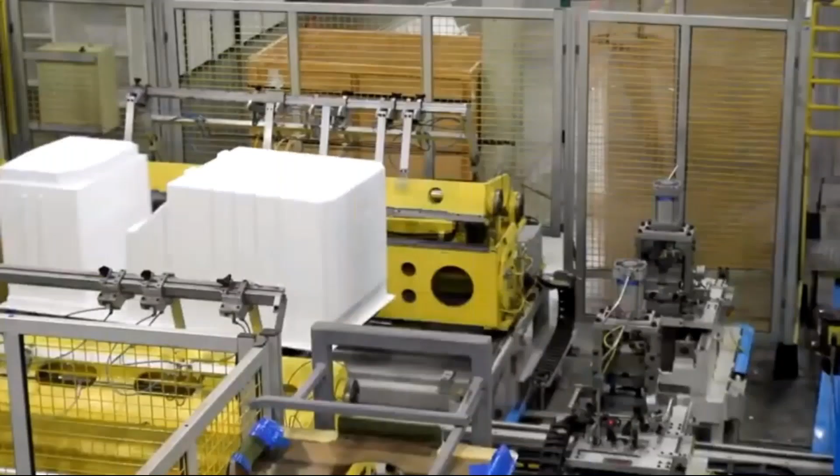Our roadmap of the future looks very bright, with thousands of new members joining this society every year and bringing in a fresh outlook to our industry intelligence, which consists of some of the best minds of our industry. It publishes technical books, newsletters, and a prestigious journal, distributing the wealth of knowledge to all its members. Working with government departments, ISHRAE helps formalize industry codes and standards.

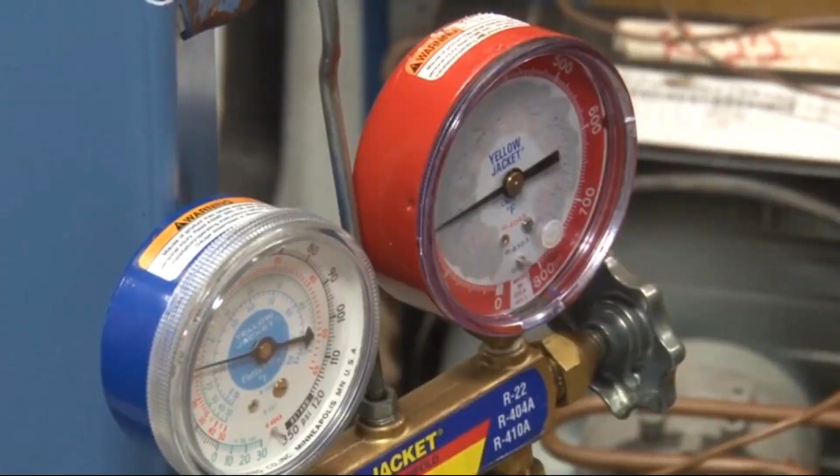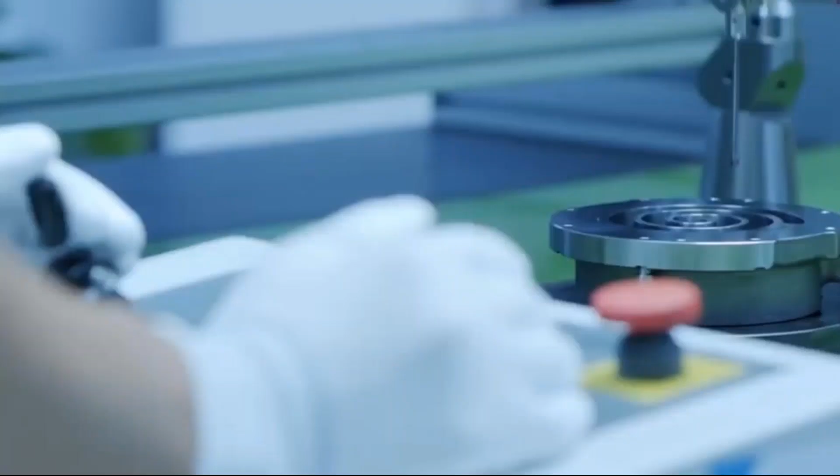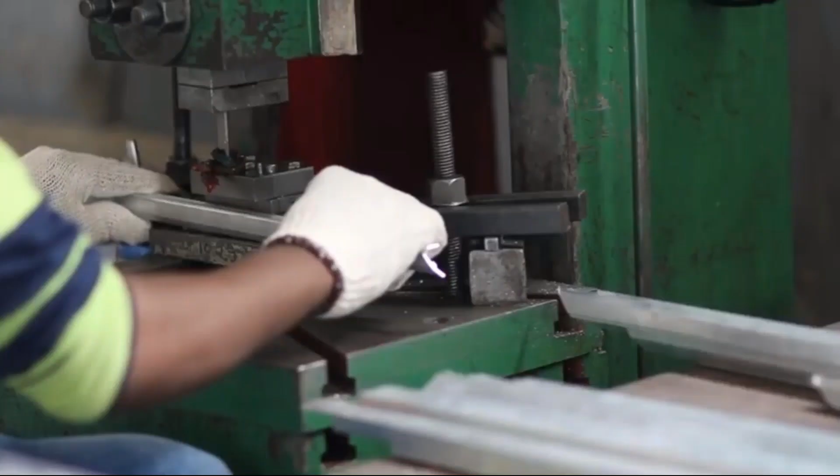ISHRAE promotes research by offering financial support to student members to carry out groundbreaking work in technology, systems, and processes. Our educational wing, ISHRAE Institute of Excellence, organizes training programs and workshops to help members enhance their skill sets. Our specially designed certification programs under ICP, that is, ISHRAE Certified Professional, empower professionals to always be in step with prevailing technology. Specially designed courses for technicians are offered to meet the ever-increasing demand for a skilled workforce.

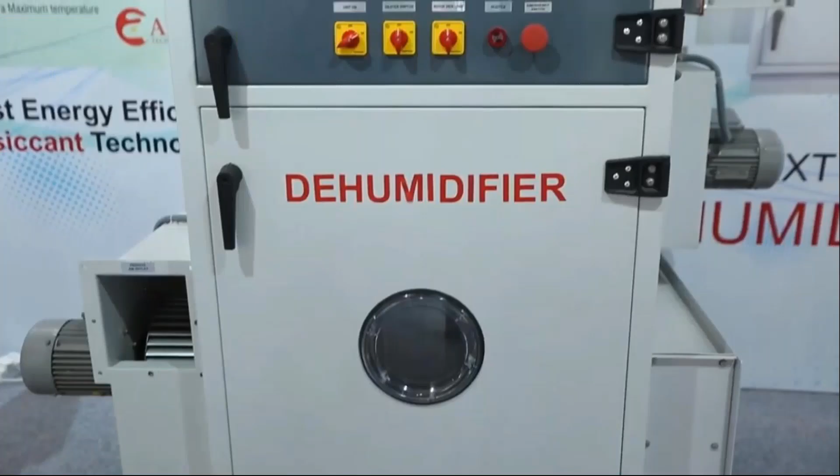ISHRAE organizes exhibitions, conferences, panel discussions, and product presentations throughout the country. We organize the industry's largest international exposition in South Asia, ACREX India, to showcase the cutting-edge technology, innovation, and provide a platform for closer interactions amongst the decision makers in the industry. The ACREX exhibition is now growing from an HVAC and R show into a Build Fair and Allied, bringing together several allied shows connected with the building services industry all at one location. Our chapters organize several other popular events like AgriConf in Delhi, Raycon in Kolkata, Symposia in Mumbai, TechFest in Goa, and many more.

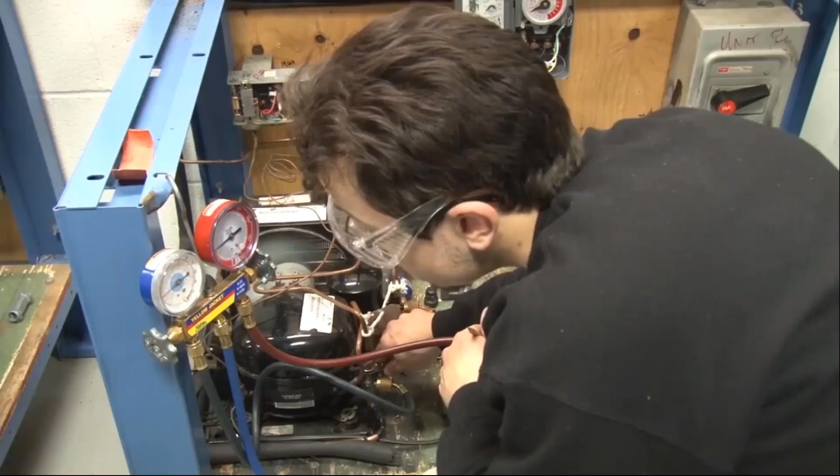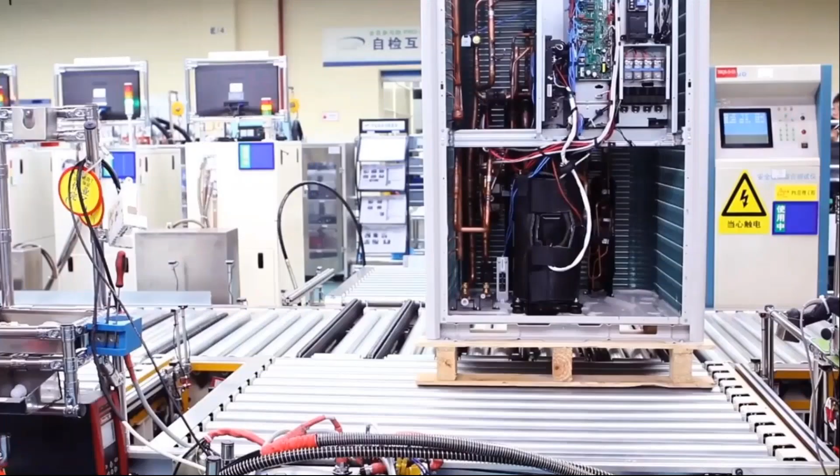We are committed to provide training and career guidance to our student members through seminars, lectures, quiz contests, and site visits. AQuest is a prestigious quiz competition organized by ISHRAE to catalyze the transformation of the budding engineering professionals. ISHRAE provides a platform to potential employers to select student members for careers in the HVAC and R industry at the ISHRAE Job Junction. Young minds are made aware of the need for saving power, clean air, and sustainability. The K-12 initiative of ISHRAE focuses attention on school students' development to inculcate a scientific fervor and help develop them into responsible citizens.

Speedy information is imperative to keep moving forward in this hyper-connected digital age. Searcher, a specifically designed search engine, is now available, which allows access to a well-catalogued database on the HVACR and building services industry with just a few clicks. ISHRAE cooperates with various national and international bodies, industry, governments, academia, and think tanks to promote the concept of sustainability, environmental protection, and energy efficiency and conservation.

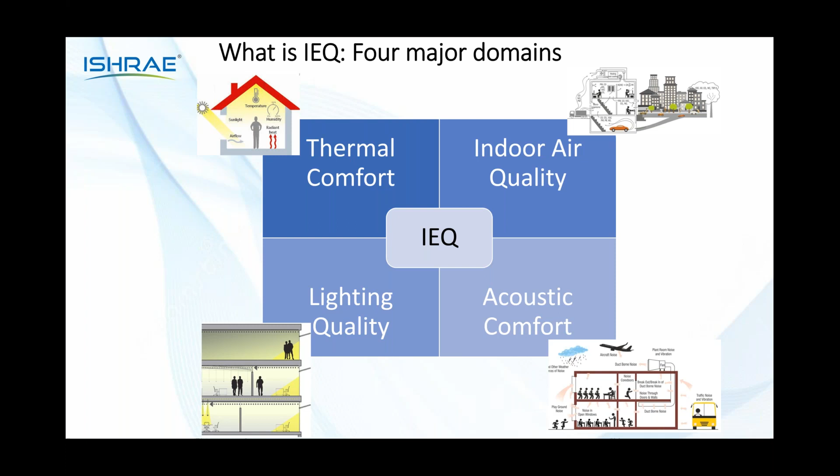So these four are actually linked to each other, and in our opinion, they should not be looked into in isolation. You should look at them very comprehensively, and that is why ISHRAE thought that we should combine them in one single standard, and we became a global leader. We are very proud of that and now other countries are following that. So when I'm talking about IEQ, we are very clear what we mean. The other common term is IAQ, but with IAQ we only mean air. So IAQ is a subset of IEQ.

So why do we talk about IEQ quite often and why is it important? Many studies have been conducted which prove that wellness, how well people are in my office, directly affects my productivity. So if people are not very well, if they are stressed, if they are sick, my total output from my office gets adversely affected. So people have a very strong feeling, and that is a fact also, that wellness leads to productivity. And what governs your wellness is basically indoor environment quality.

If I have bad air in my office, if I have mold getting generated in my office, if I have a lot of particulate matter in my office, if I have under illumination in my office, my employees will get different kinds of problems. It may be headache, it may be sore eyes, it may be irritation in the nasal path or any other thing, which may affect their wellness and in turn will adversely affect productivity of my organization.

So therefore, if you want to have high productivity, you should have better IEQ, indoor environment quality, and that is what is well established quantitatively also, as well as subjectively. People understand it from ancient times also. So when we talk about productivity loss, and that productivity loss can be because of poor IEQ, what are the hints? What are the hints you can capture without even going for measurements?

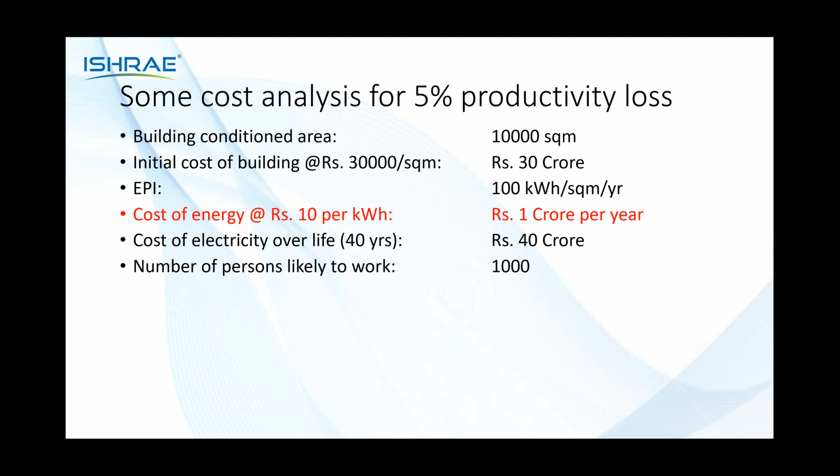Let us take the number of persons who are likely to sit in this building, 10,000 square meter. I'm assuming 10 square meter area is available to each person. And so 1,000 persons are likely to work in this office. This number again can be more or less, but I'm taking approximate number.

Average salary, if I'm working in a building which is located in Delhi, Bombay, Bangalore, Hyderabad, or any other big city, even in Jaipur nowadays, annual salary of 10 lakh rupees per annum is not that high. So CTC, cost to company for any person, average is 10 lakhs, what I'm assuming, because salaries are touching or crossing even 1 crore.

What happens is after COVID, don't ask me. That's a difficult question, but this is what is prevailing right now.

So average salary is 10 lakh.

If I estimate the salary cost of these 1,000 staff, totally 1,000 persons, that gives me a number of 100 crore. So 100 crore is my salary bill for this building.

I'm assuming 5% productivity loss from this building. What does that boil down to? 5% of 100 crore makes it 5 crore per year. So just because I'm not providing a good working environment, if my productivity loss is 5%, I'm likely to lose 5 times the total cost of energy that my building has.

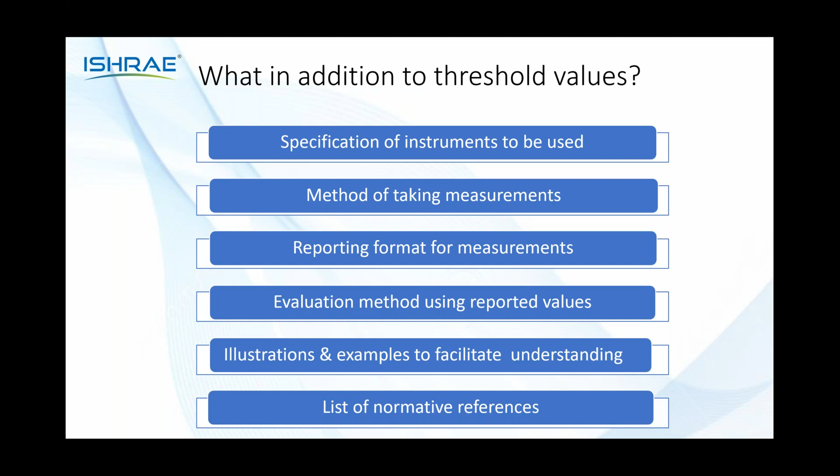Similarly for lighting, do I make the measurement right below the lamp, or if I have a 2 meter by 1 meter table, do I measure lux level at the center of the table, or at the 4 corners and take an average? So there are standard methods of taking measurement that are specified in the standard.

And then we have reporting formats, evaluation formats, and examples and illustrations are also there, along with references. So these are unique features of this particular standard; not many standards globally have many of these things.

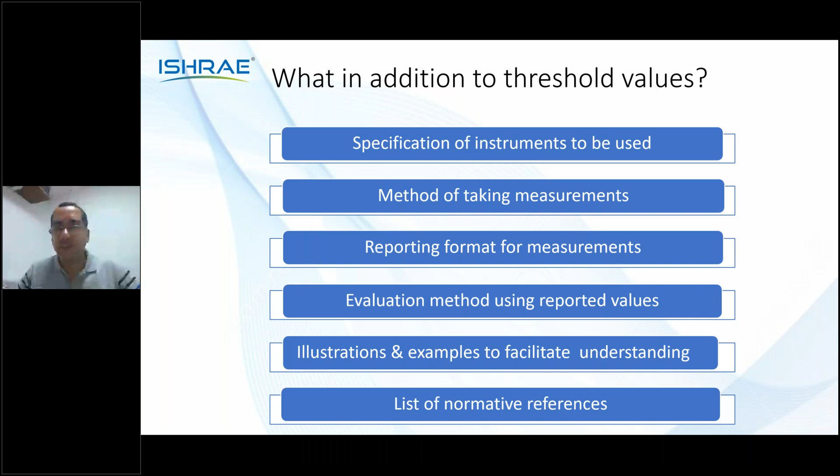Let's come to the first section, which is thermal comfort, and the concept of operative temperature is what is used in thermal comfort. Operative temperature is a combination of indoor air temperature, air velocity, and mean radiant temperature. These three parameters together make the operative temperature.

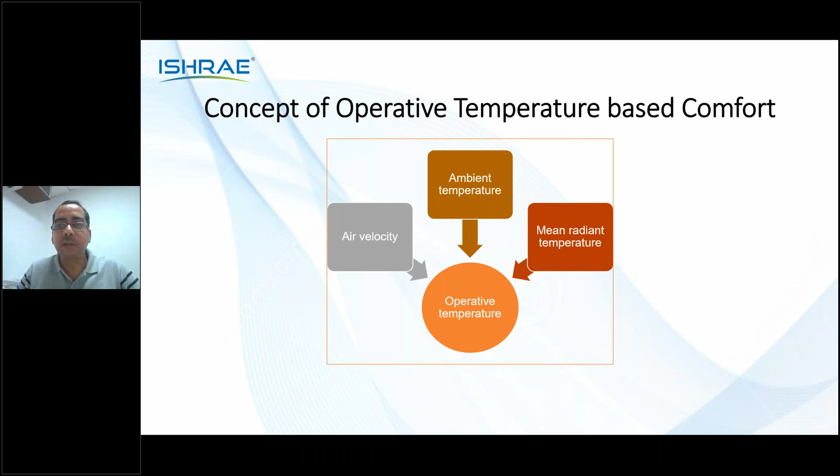So far, a very common notion is that air temperature alone makes you comfortable or uncomfortable. Yes, primarily it does. But if you have higher air velocity, you can still be comfortable at higher temperature. If you have a very hot or very cold surface close to your seat, you may still be uncomfortable or comfortable even if the air temperature is higher than usually preferred.

This becomes very important because in India we have high intensity of solar radiation, and many buildings have large usage of glass. If the sun is directly throwing its radiation on the glass, it becomes very hot and radiates heat to you.

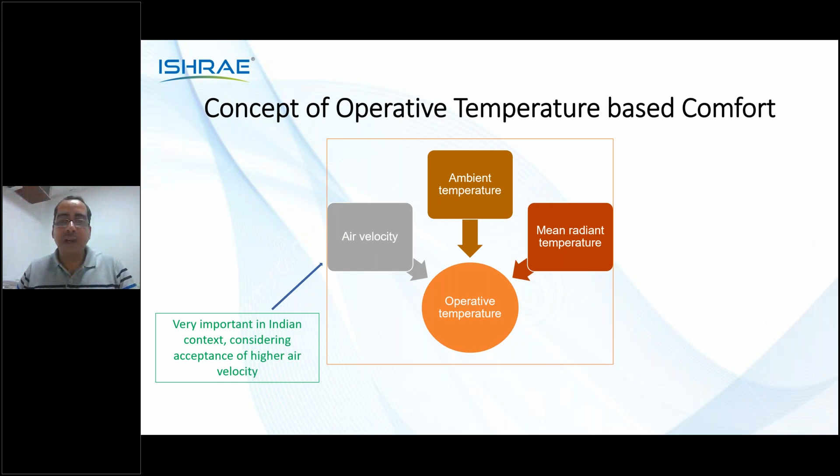Despite having a low air temperature, you are likely to be very uncomfortable. So operative temperature is the parameter calculated by noting down air velocity, mean radiant temperature, and air temperature inside the room, and that is what the metric is.

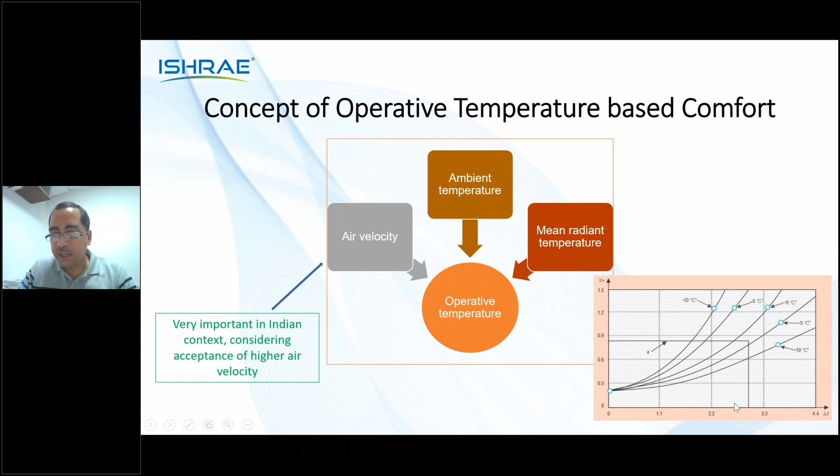On the y-axis I have air velocity. So if my air velocity line is roughly 0.8 meter per second, it touches the 0 degree line on the graph at a certain point, and I drop a perpendicular to my x-axis from there, and it is likely to be something like 2.5.

What does it mean? 2.5 means usually at still air, if people are comfortable at 25 degrees, you add 2.5 to that, making it 27.5. Most people are likely to be comfortable at 27.5 degrees centigrade if the air velocity is 0.8.

Now you can note that as air velocity increases, I get a higher value on the x-axis at the intersecting point, which means higher the air velocity, higher is my comfort temperature.

This point is becoming very important in our time with COVID, since the COVID virus tends to have a lesser life at higher temperature. So there is no point, particularly now, setting your thermostat at 22, 23, 24, or even 25. Try to set it as high as possible, and maybe use a ceiling fan or table fan in addition to your air conditioner. There will be two advantages.

One, for every degree temperature rise in your thermostat set point, you save about 3 to 4% of energy. Second, which is more important these days, is that the life of coronavirus becomes exponentially less as temperature increases beyond 24 degrees. So this advantage, together with energy saving, is a win-win situation. So why not capture that?

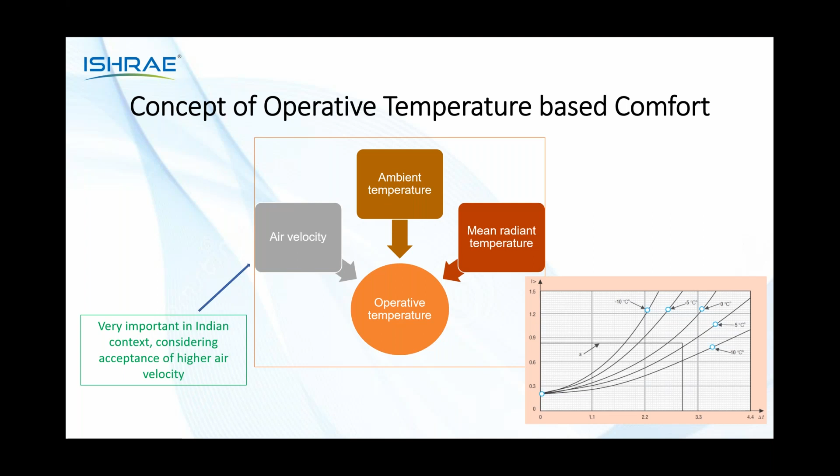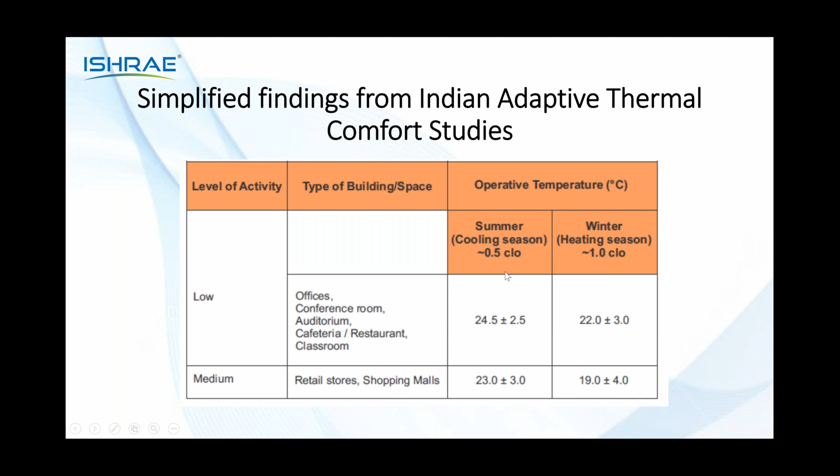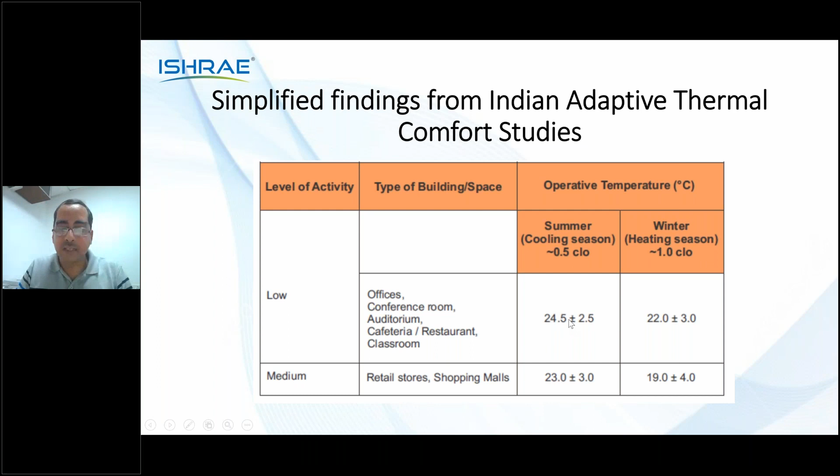Of course, clo value means the resistance offered by my clothing. So 0.5 means I have less clothing. Obviously in winter we have more clothing, so the resistance offered is different. So I have to be talking in context of the kind of clothing used in each season. If in summer, for any reason, I have to use a higher order of clothing, my comfortable temperature will be less. But usually you should not do that.

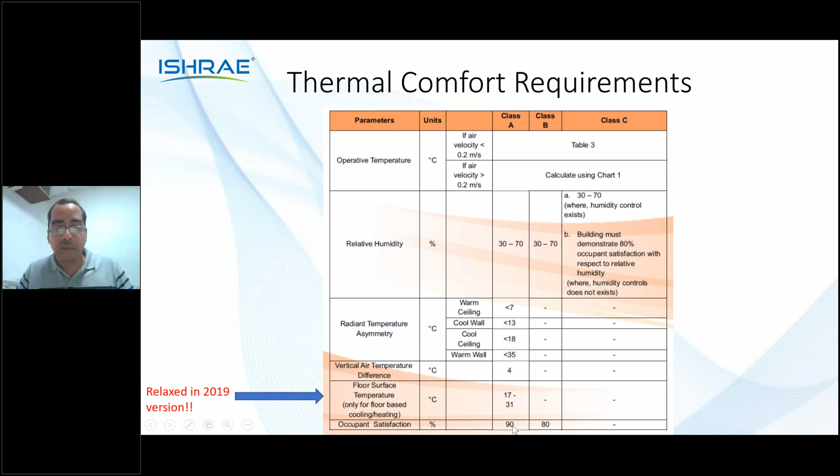If you claim Class B, you should have 80% of your occupants being satisfied — that's the last row I'm reading, 80% of your people should be satisfied in your building. If you are claiming Class A, 90% of your people should be satisfied. And for this, you have to conduct an occupant satisfaction survey, which is also given in the standard.

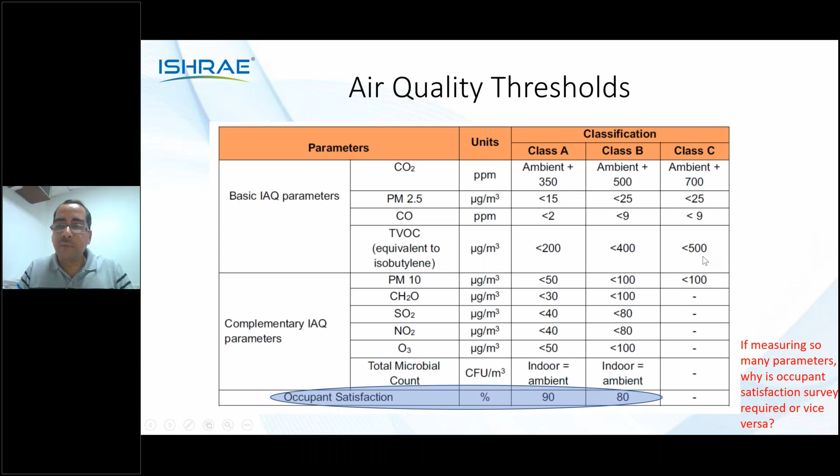Similarly, there are thresholds for air quality. For example, PM2.5 is very common, or CO2 is commonly talked about, or TVOC. You can see that the stringency is much less in Class C, which is 500 micrograms per meter cube. It reduces to 400, and it reduces to 200 if you are Class A. This is how the standard gives different levels of thresholds for different parameters.

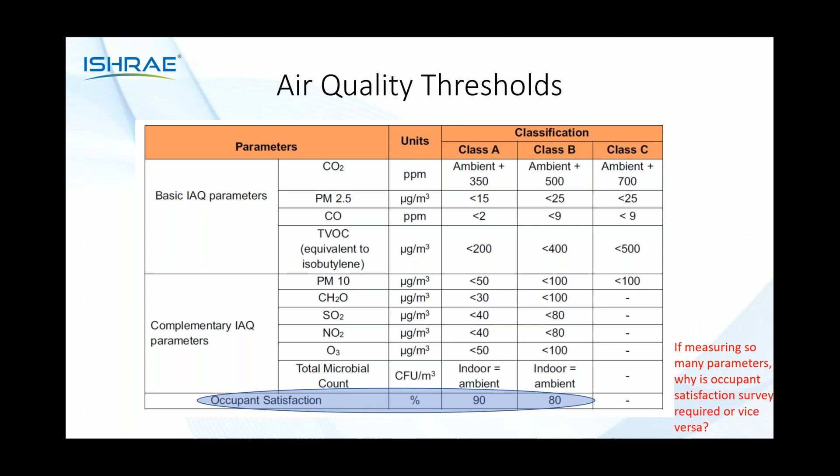Some parameters which are difficult or costly to measure have been left for Class C, so that somebody interested in just meeting a bare minimum requirement of IEQ should not incur a very high cost. So if your TVOC level increases beyond a certain limit, we also recommend that you go into the breakup of TVOCs, and that is the new approach in the 2019 version.

There are two compliance paths, two compliance options in IAQ particularly: one is spot measurement, another is continuous measurement — path A and path B. For spot measurement, your equipment should be highly accurate and random sampling should be done. For continuous measurement, you can have relatively lesser accuracy of instruments, but they have to continuously record. So as an IEQ auditor, you can choose either of these two. Both have their own advantages and disadvantages.

So then coming to the lighting section, which is the third section, visual comfort.

Usually we are talking about lux level only, that okay, 300 lux or 400 lux on a working table in office is good. But we do not talk about what quality of light is there, whether it is a yellow light or a white light or cool white or warm white. Are all lux levels same? So that is basically the point.

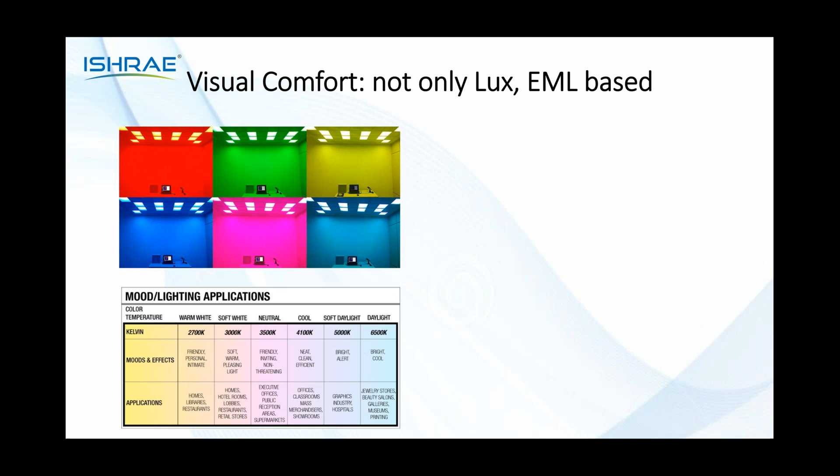So what is to be done is there are conversion factors given in this standard. The luminaire properties are to be modified as per the quality of light that it delivers. Suppose a 300 lux CFL is there, whereas a 300 lux LED with cool white is there. Both the 300 lux things would result in a different value of EML. Maybe a cool white would result in a higher EML level, and the warm yellow would result in a lower EML. So those kinds of situations may be there.

So the message is do not stop only by measuring lux level. Look at the quality of light and then settle down with the lighting design. In addition to this, you also have to look into uniformity of light. This should not be high contrast, otherwise it results in blind spots and so on. Ratio of background light to foreground light, those things are also there. Those limits are prescribed in this standard, and you should be measuring all these points.

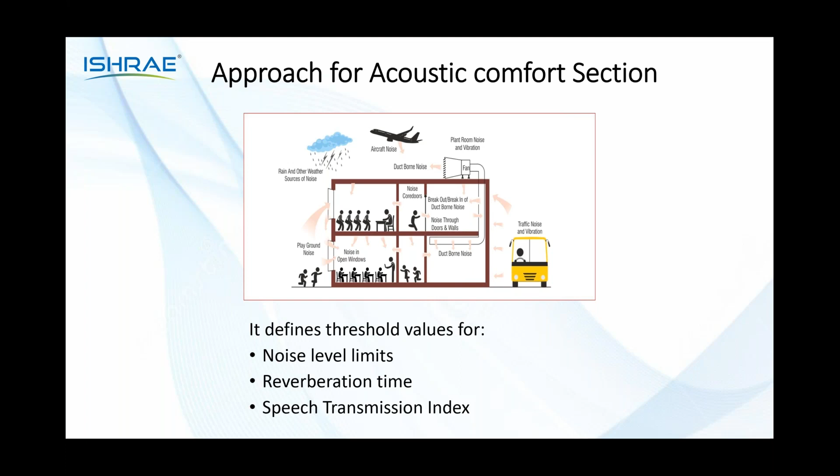Last section is the acoustic section, and it defines 3 things. One is the noise level limits: what are the noise level limits if you target class A, class B or class C? Reverberation time is very important because it governs the echo in my office, and therefore it is a very important parameter. And third is speech transmission index, which is basically the deterioration of sound when it travels from point A to point B because of the acoustic properties.

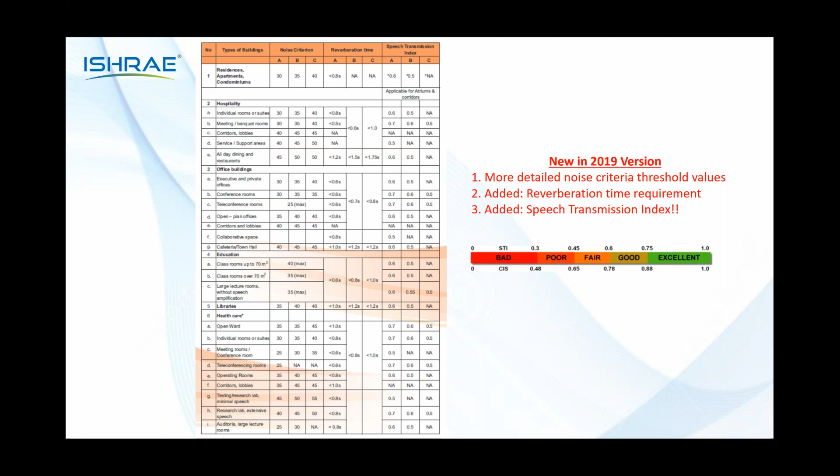So these three things are defined in this acoustic section, and different kinds of spaces require different noise criteria, different reverberation time, and different speech transmission index, as you can see in this table. So you need to identify what kind of space you have, whether it is an office building, for example, private office. So I should not have speech transmission index of 0.5 or 0.6 if I am in a class B or class A building, because otherwise the communication between the persons sitting in this office will not be that good. That is what is defined in this particular standard.

The last question which came to us after defining these is, are these levels achievable? Therefore we conducted a project in different buildings in Jaipur and Chennai. Jaipur lies in the composite climatic zone, Chennai lies in the warm and humid climatic zone, and we studied these parameters throughout the year. For 1 year, measurements were taken in institute buildings, office buildings, residential buildings, malls, and in addition, we did an occupant satisfaction survey to see whether we have defined something achievable or non-achievable. This project was taken up by us with IIT Madras.

Means 80% people were found to be okay with the indoor air quality. 81% of the occupants whom we studied were found to be okay with thermal comfort, and 89% of the occupants were found to be okay with the lighting quality. Now look at the values that we got.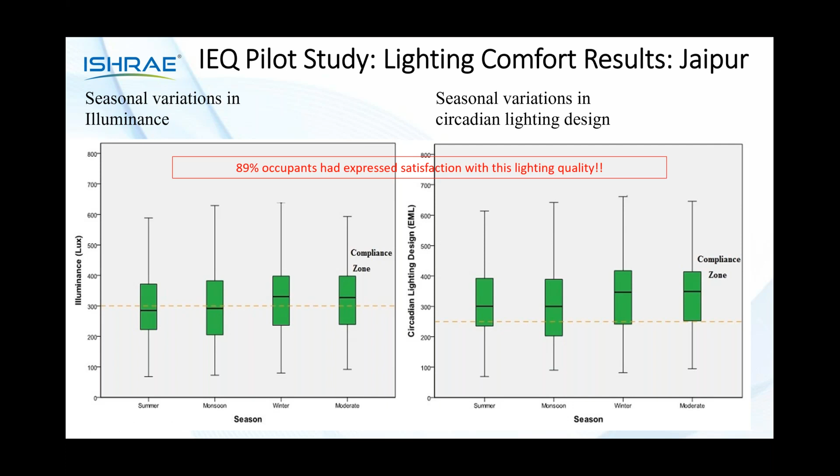And seasonal variations in illuminance. In illuminance, again, you can see this dotted line is the threshold of EML level. And what is there? Half of the subjects have good illumination, but half have bad illumination also. So half are under illuminated, but still you can see that 89% of the occupants said that we are comfortable. And this is what makes us think whether to rely on measurements or whether to rely on occupant survey.

And this is where I would like to conclude today's talk. So first is IEQ standard is implementable. That is what we concluded. We had a lot of measurements, but because of shortage of time, I have cut down the measurement related graphs. But yes, more or less they are implemented. It is not that something unachievable is mentioned in the standard.

Second is it can provide more productive environment in building. If you have good IEQ, your environment can be more productive. Third is threshold levels are achievable with conscious building design and system design, and basically proper maintenance and other good practices.

So if you have threshold levels not achieved as of now, make sure that what modifications can easily be done in your building, and make sure that you are doing that. Your system design, if it is nicely done, whether it is air conditioning system or lighting system or any other system, you can still achieve those things.

Two very important conclusions. Occupant opinion only is not sufficient. I found many people saying that my building is very good, nobody complains in my building. Nobody complains doesn't mean that your environment quality is good. We have seen through the statistics in previous 2-3 slides that opinion of occupants may be good, but still the environment may not be that good. So that is one mismatch that you have, and therefore what we recommend is do both. Do occupant satisfaction survey and take measurements, and then conclude about your indoor environment quality.

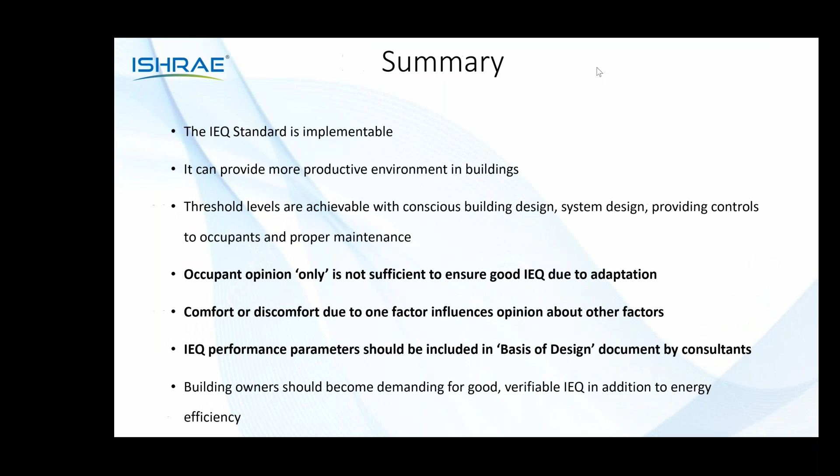I'm not pretty sure what the question is. I'm repeating the question, sir. I hope you can see the question, sir. I'm repeating it. In the Indian context, let me unmute the participant. Yes, Mr. Rutwan Sheth, you are unmuted. You can ask the question. Okay, I can't hear it. We'll come back to him later.

Coming to the next question, that is, what are the methods to balance use of inlet solar energy and thermal standards of a building? Sorry, can you repeat the question? What are the methods to balance the use of inlet solar energy and thermal standards of a building? I mean, solar energy. Yes. The question is not clear. We are unable to unmute it. Okay. Coming to the next question.

Can we use ESP filters instead of HEPA filters? You can, depending upon the cost. ESP filters would have an operational cost and first cost, so you have to have the cost benefit analysis done. You can use ESP filters also. People are actually using them, so you can do that.

Okay. Another question: is there any way that we can use lenses to multiply the inlet of solar energy, for lighting energy, and hence minimize the lighting energy requirements, maybe light pipes? Yeah, so this concept is basically the light pipe concept. People are using it; in fact, there is one installation in Jaipur itself. We had done it long back in the manufacturing unit of REIL, Rajasthan Electronics and Instruments Limited. They are manufacturers of solar panels.